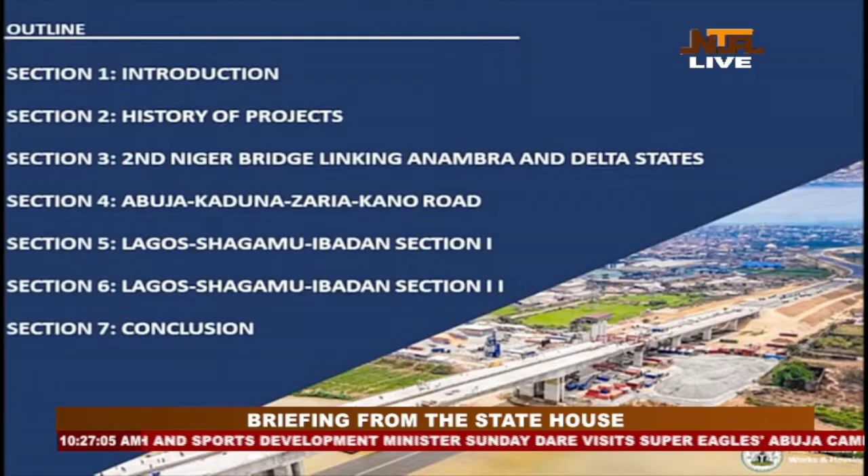So I'm going to start, well, I think that deals with essentially this slide, the background to the fund. What you see here are the projects under the PIDF. They're just a few projects. So there are those projects that have given us some headaches, if you like that word, as a country for some time. The Lagos-Ibadan Expressway. That road has been in the making since maybe year 2000, and no construction worthy of the name has taken place there until this fund kicked in, really.

The other project is the second Niger Bridge. Again, we've heard about it. Second Niger Bridge is coming. As I tell people, you hear about the second Niger Bridge just when elections are coming. And after that, nothing happens again. So that project is here now.

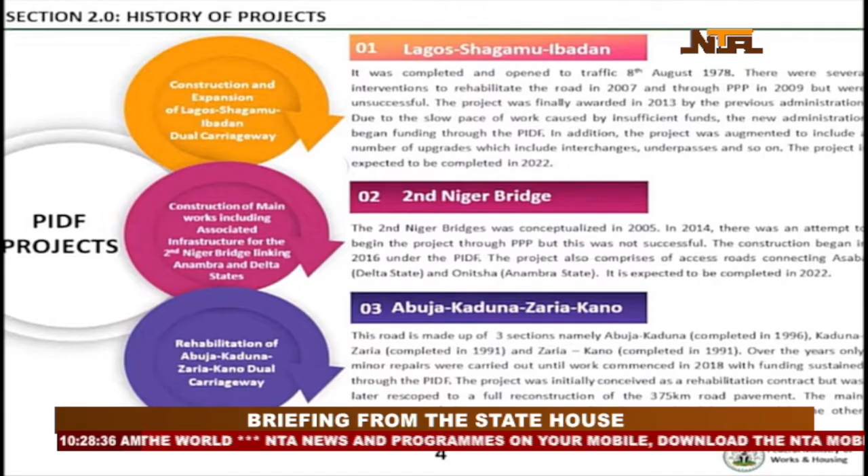And then, of course, the Abuja-Kaduna-Zaria road. The dualization of that road took place around 1986. I think it was about 175 kilometers of it then under the Babangida administration. It was completed in 1991. And since then, that is about 30-something years or thereabouts. So that road has reached the end of its design life. So it has to be rebuilt. So that's why you will see potholes, you will see failures.

Roads don't last forever. They are designed for a number of years, subject, of course, to maintenance and also, more importantly, lack of abuse. So if you don't abuse it, if you maintain it, it will achieve its design life. So that road has reached the end of design life and is now due for reconstruction. So let's start with the second Niger Bridge.

This is works going on. This was our last trip. I think that was March, right? When did we go? Man, time flies by for me very quickly, so pardon me.

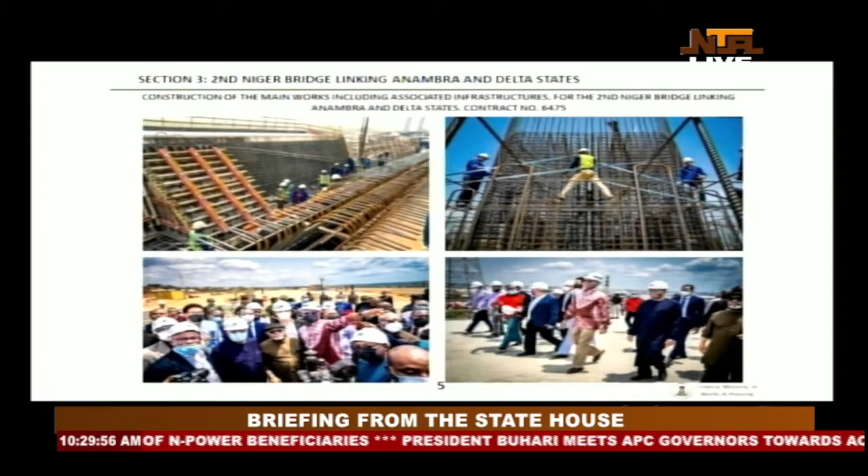Now, those who have followed this project will know that our ministry, either myself or the directors, visit regularly to monitor. But again, for the benefit of this meeting, we have a monthly meeting called the PIDF monthly meeting. And that meeting involves myself, the Minister of Finance, because there are financial issues, the MD of NSIA.

The meeting is chaired by the Chief of Staff to the President and all our directors, to assess progress. Reports from that meeting are passed on to the President because he's very, very passionate about this project. So he has first-hand knowledge of what is going on in this project, even without actually visiting.

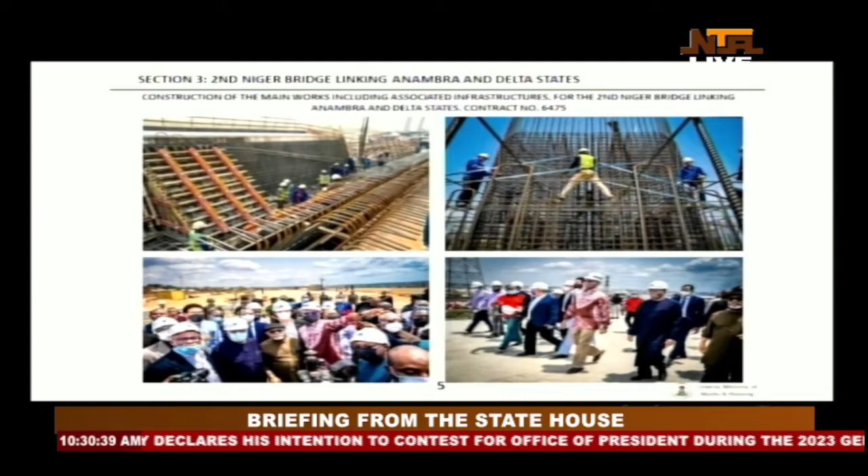So last year the Chief of Staff said, well, we see these things on slides, the contractors present to us every month. I want to go and see what is going on. So last year or so, we went to all the 3 projects, but the Chief of Staff was only able to accompany us on the Kaduna Zaria, where we had a town hall meeting. Some of you might remember. His work schedule made it impossible for him to complete the 3.

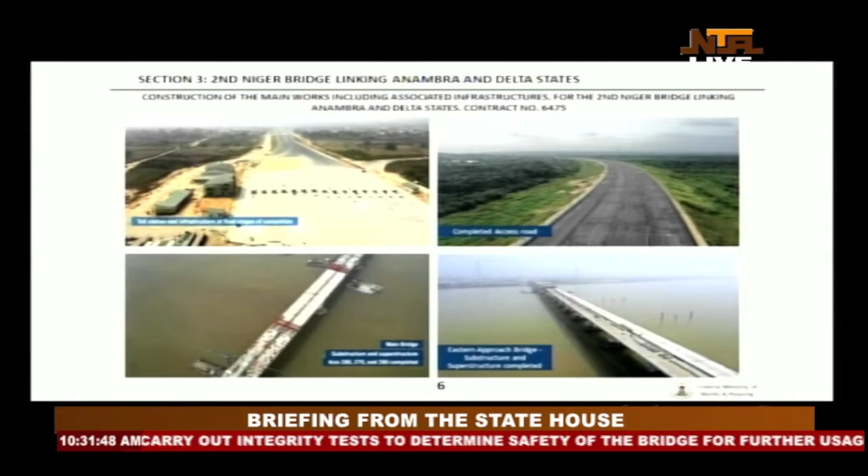And the ones to the bottom left and right are aerial shots of the bridge. Those 2 places where you see red items are structures for launching the beam. So those are the 2 places left to complete the bridge work. And they're just a few meters, maybe the distance between here and here. So I think one part of it would have been completed by the 15th of March. That was the deadline.

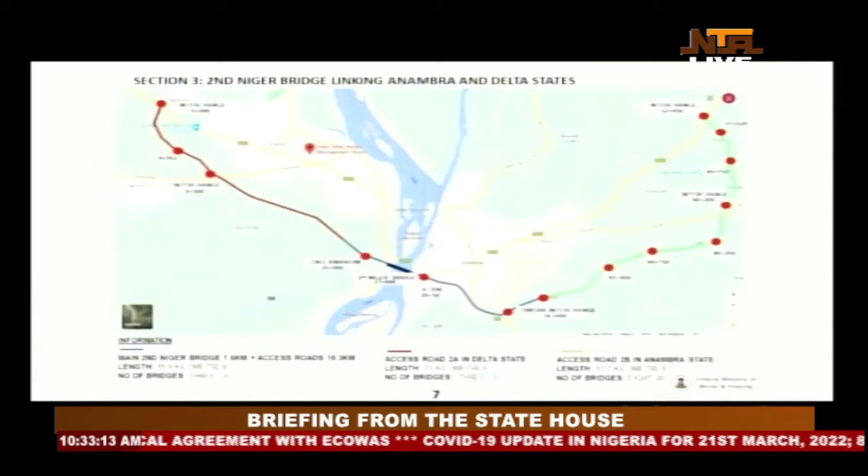In the middle there is that bridge. The sky blue area, let me see, I think there's a pointer here somewhere. Yes, this is the River Niger and all of its tributaries. So this part is the bridge itself, and this part is the access road, all this blue part up to here. I hope you can see. So all of this from here to here is 206 billion naira, thereabouts. 1.6 kilometer bridge and 10 kilometers of access road combined.

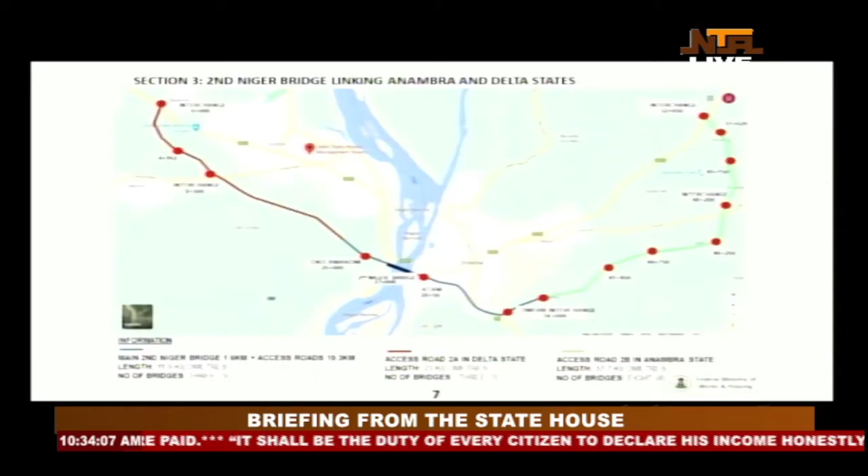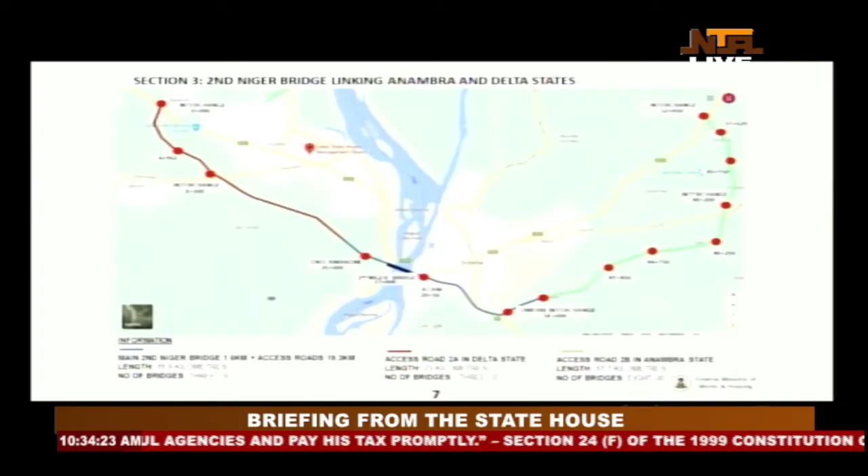Now, from here to here is 17 kilometers of access road on the Anambra side, I think. There's an interchange here, which is part of what we are doing now, but this green part is going to come later. It's not part of this current project. We call it phase 2B. And then there's this red part here that links this side to here. This is the Delta side. We call this phase 2A. Again, that's not part of this current project, but there will be work that will continue after we have delivered the bridge and the main access road.

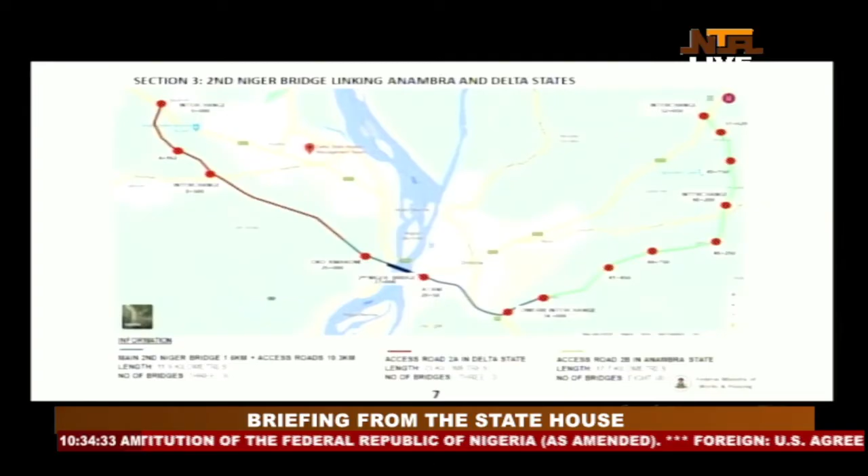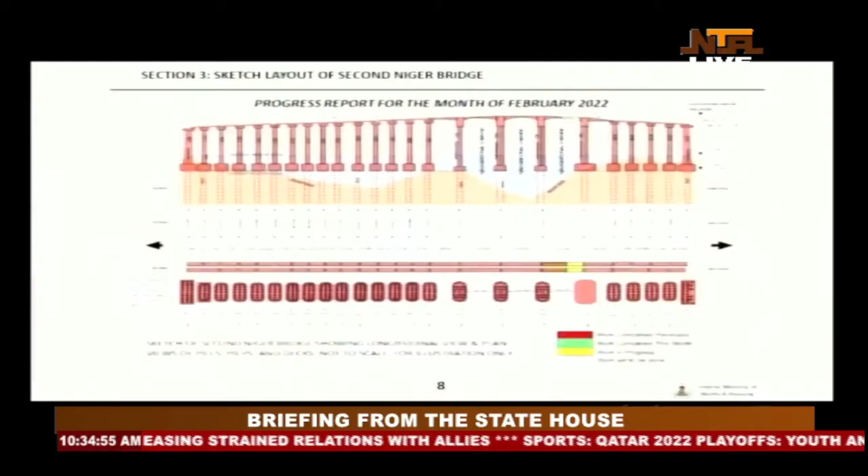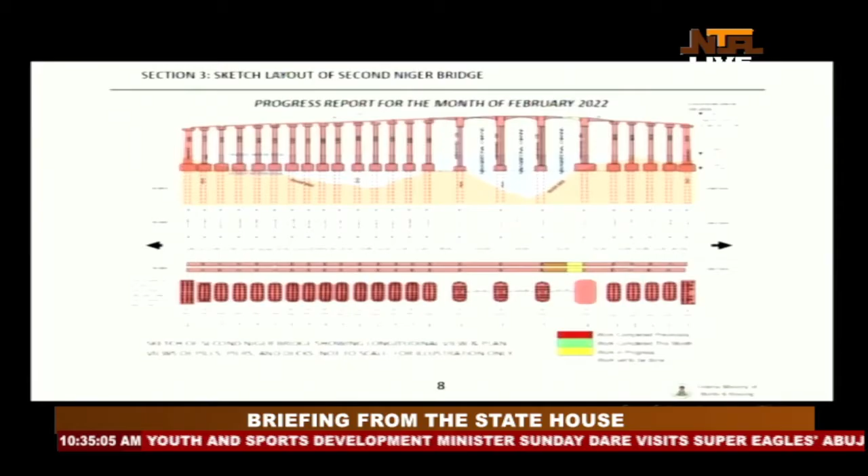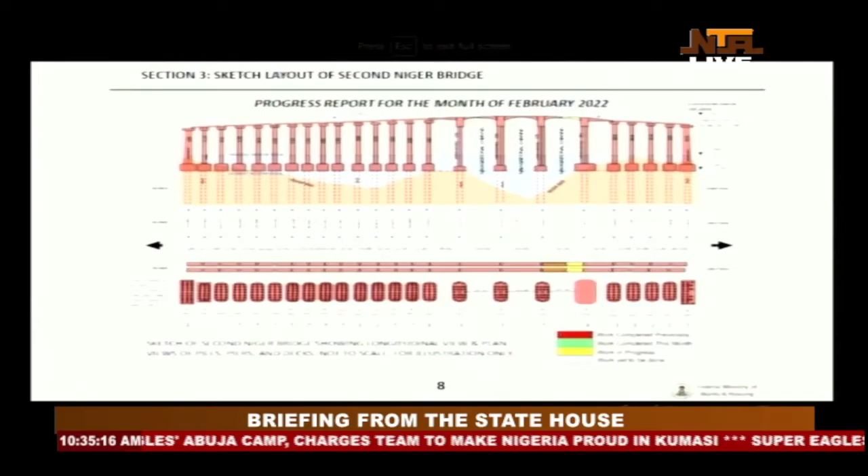So let me go quickly. This shows you a longitudinal view and a sketch of what has been done. All of these are the piles from beginning to here. Then you will have somewhere here later what the engineers call an abutment, which is like to ramp up. Am I right? Because I'm not one of them, but they try to teach me. Unfortunately, the details are not very clear, but I have something in my notes that I want to emphasize so you understand, there will be questions around this.

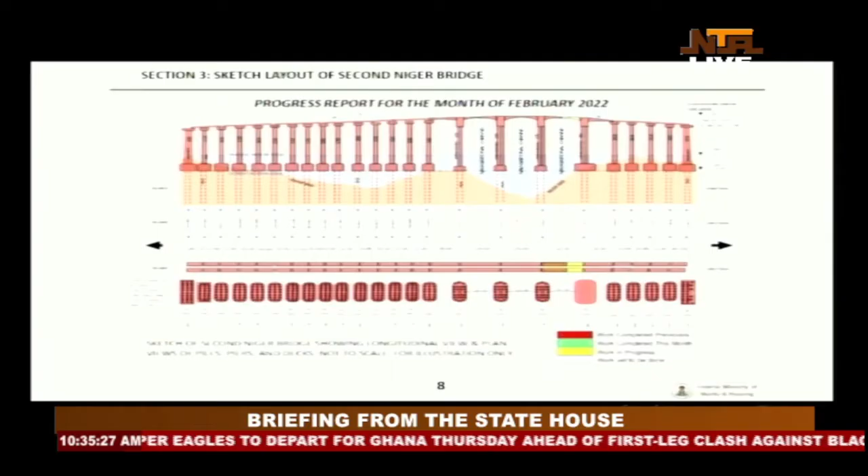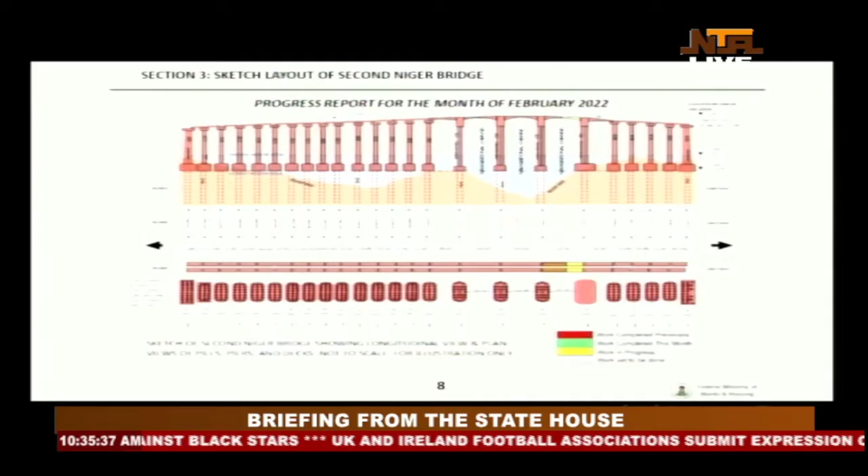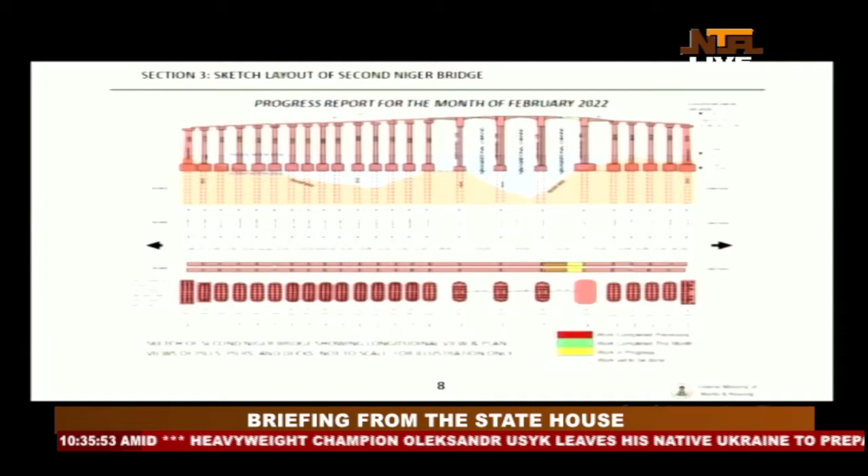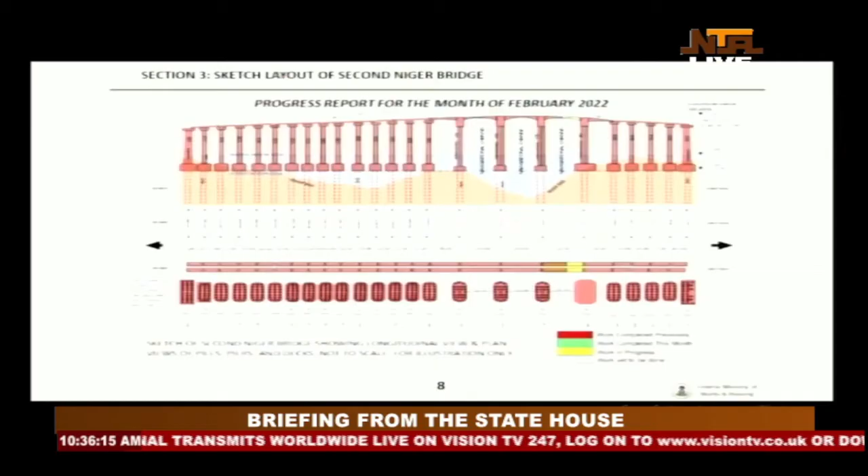Right here, the highest point of the bridge is 49 meters. If the average building from floor to ceiling is 3 meters, you are looking at about a 16-story building. This is the River Niger during the rainy season at full speed, and this is the River Niger during the dry season when the river level drops. This low point is 13 meters, about a 4-story building. This middle point, about 25 meters during the rainy season, is the equivalent of about an 8-story building of water.

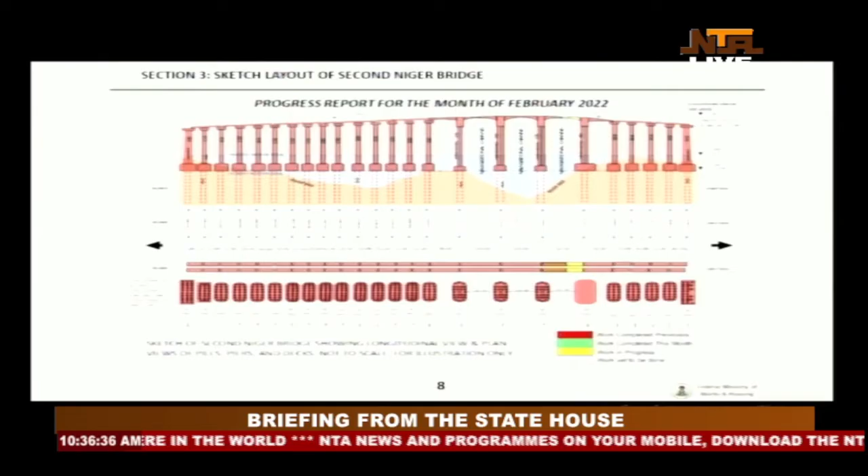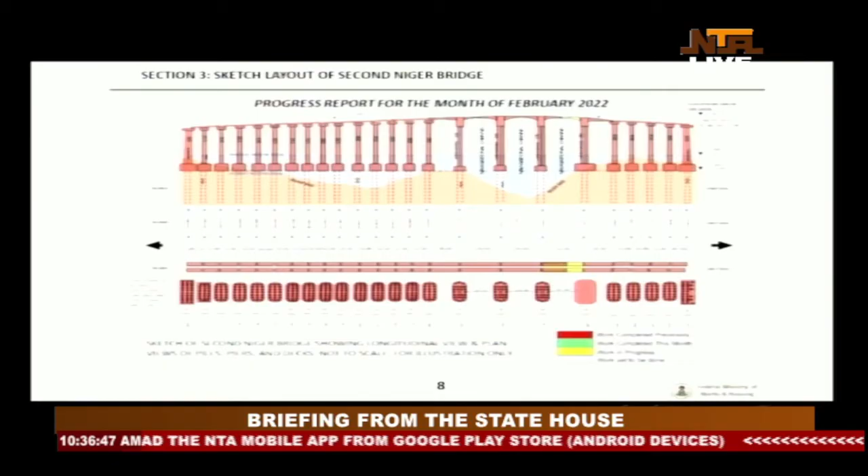So that just tells you what we have had to do. Then all of these are the sectional views of the piles. Each one of these has at least 25 piles, you know, those things that they pile into the ground. Each one has 25 to make one column.

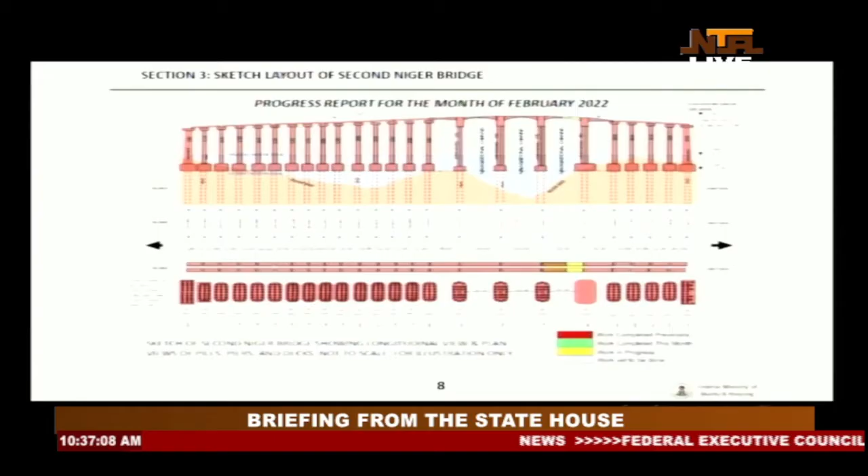Because this is a navigation channel for big barges, it is designed to withstand, I think, about the capacity of a vessel. If a vessel collides with it, it is designed, I think, for about 2,000 tons resistant capacity. So those are some of the things I can tell you about that.

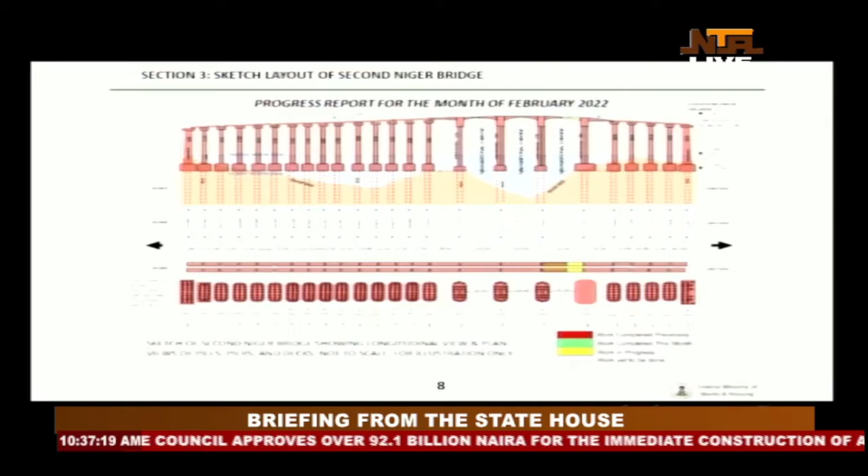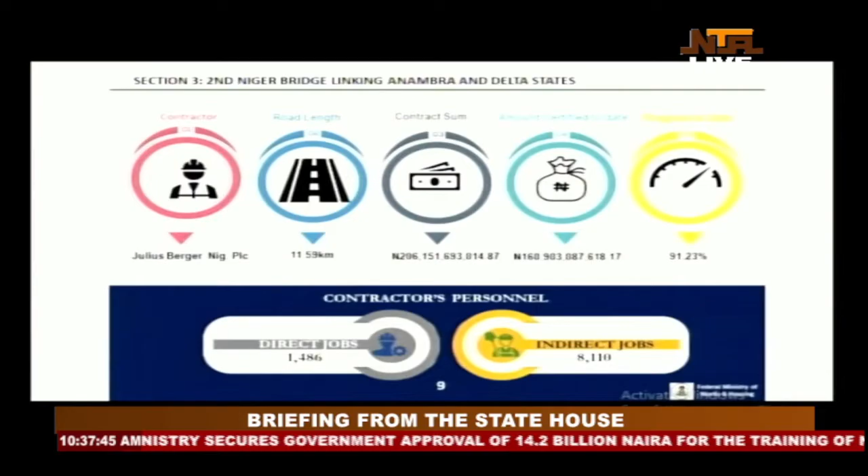Now, what you have here are just some details, and I will come back to this later. The length of the road that I told you about, the amount, 206 billion. The amount that has been certified to date is 160 billion, and the percentage level is 91%. At the moment, 1,486 people are directly employed here.

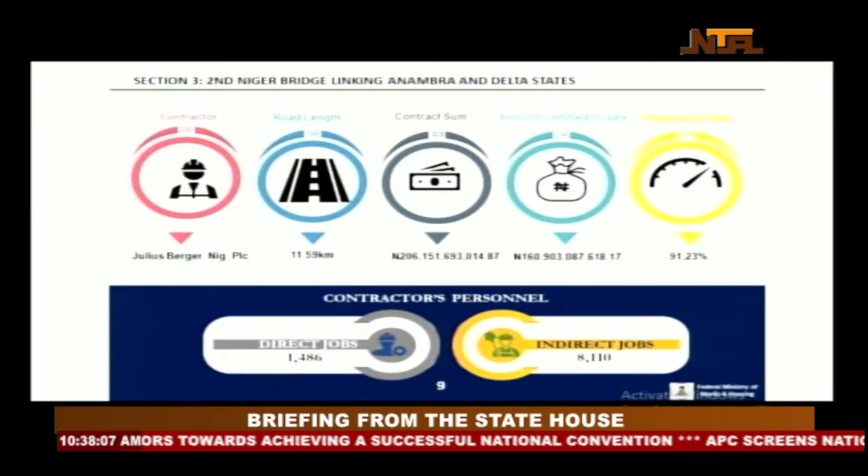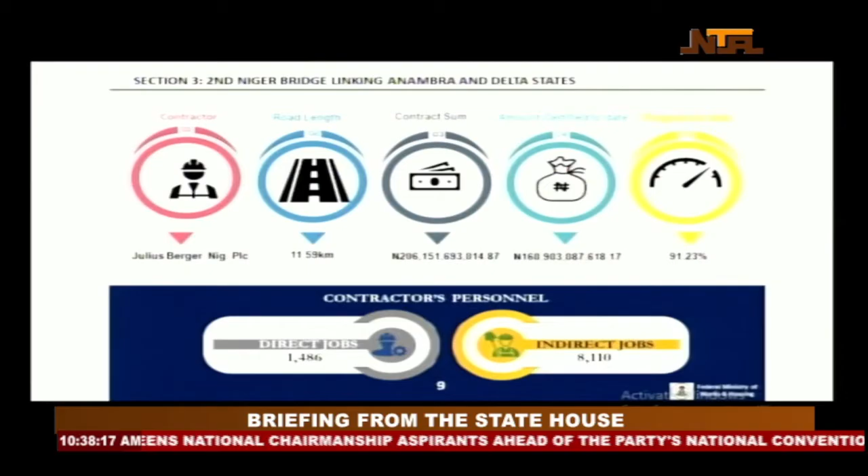So this is the place where people go every day. They leave home and say, I'm going to work. So if you look at that, that is 1,486 families. But I will come back to that. Then the spin-offs, the indirect jobs, and I will come back to this again. 8,110 people live off this bridge. Because this is happening, they are employed. Not employees of the company, but they benefit from this.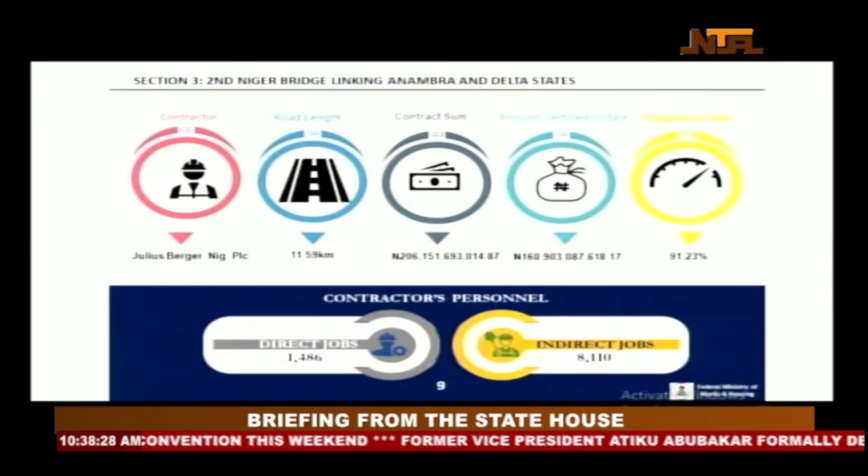So let me quickly, I will skip this because I'll come back to it in my conclusions. So let's just talk about what is happening. We took some people on our last inspection. This is what some of them are saying. We are happy. We have been hearing all this while about the second Niger bridge, but today at least I am stepping on it. The FG has really actualized the dream. That's Stella Ibuka. Then, we are happy. We thank the FG for making our dream come true.

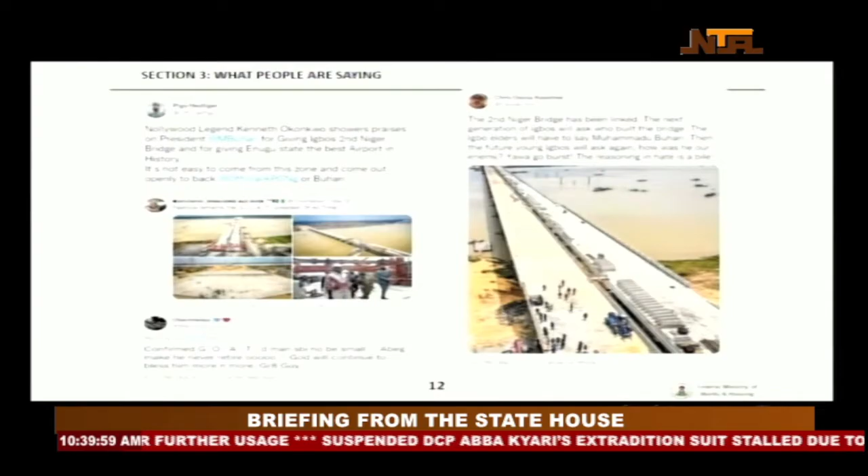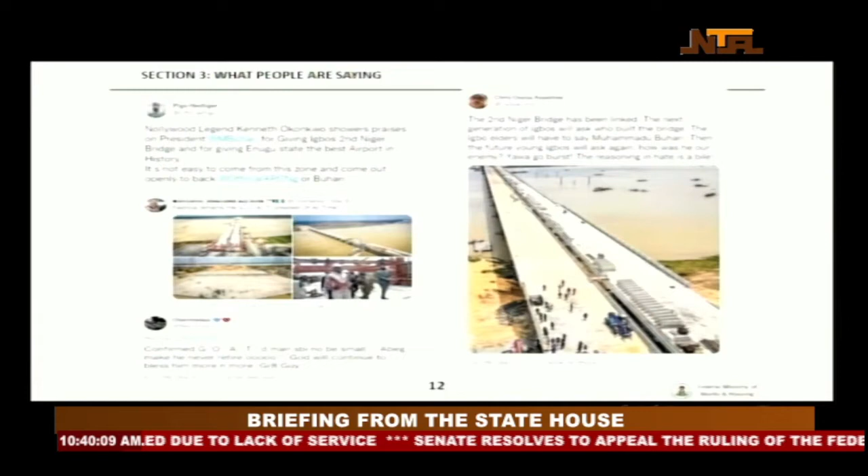So again, what people are saying: one Nollywood legend showers praises on President Buhari, confirmed, blah, blah, blah. The second Niger bridge has been linked. The next generation of Igbos will ask who built the bridge. The Igbo elders will have to say Muhammadu Buhari. Then the future young Igbos will ask again, how was he our enemy? Yawa go burst. The reasoning and so on and so forth. But there's been a lot of... So let's move quickly to Abuja, Kaduna. These are, as I said, some of the comments in the public space on social media. I'm sure many of you see it. There's a lot there, but this is us.

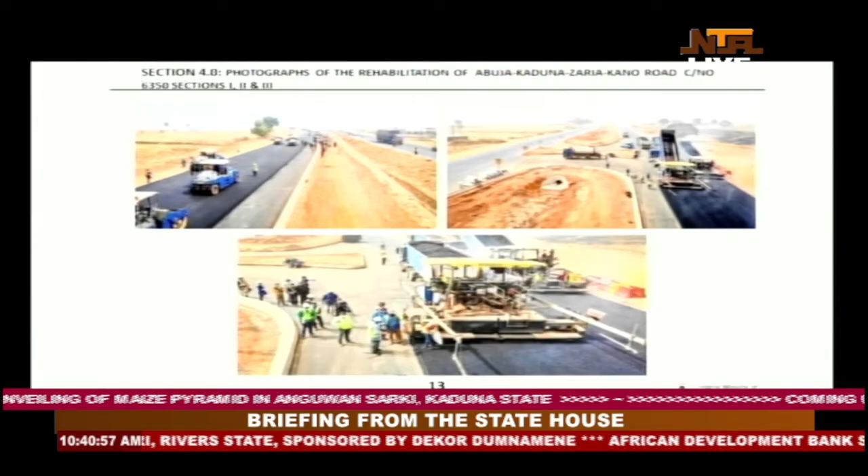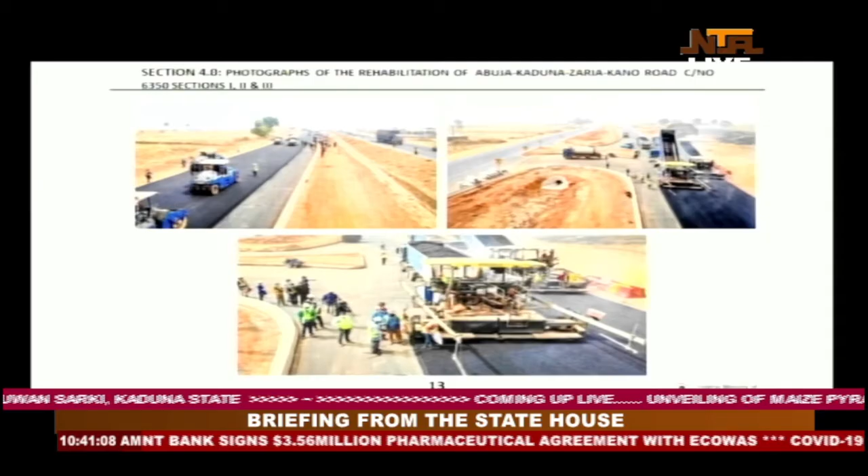So, yes, Abuja, yeah, sorry. Abuja, Kaduna, Zaria, provided some background just to let you into it. This is a 375-kilometer project. It's actually the biggest project in Nigeria. The cost is in the order of 700 billion. That length of 375 kilometers has 41 bridge components inside, 41. And this project started, I think, in 2018. So it was the last to start.

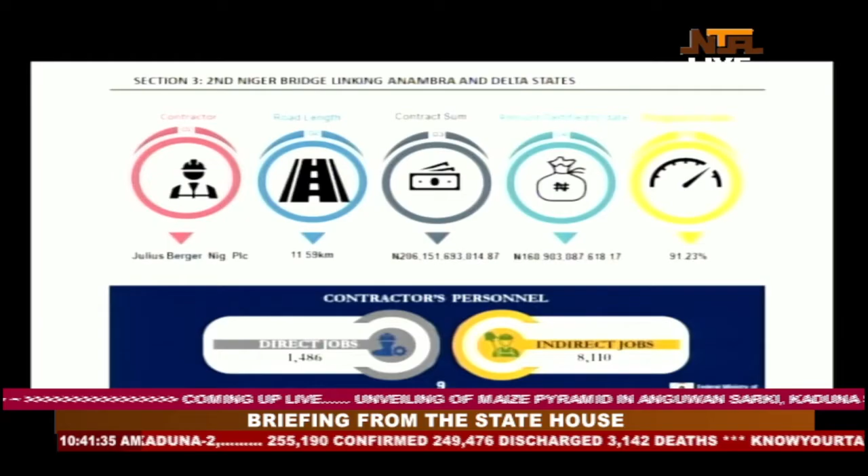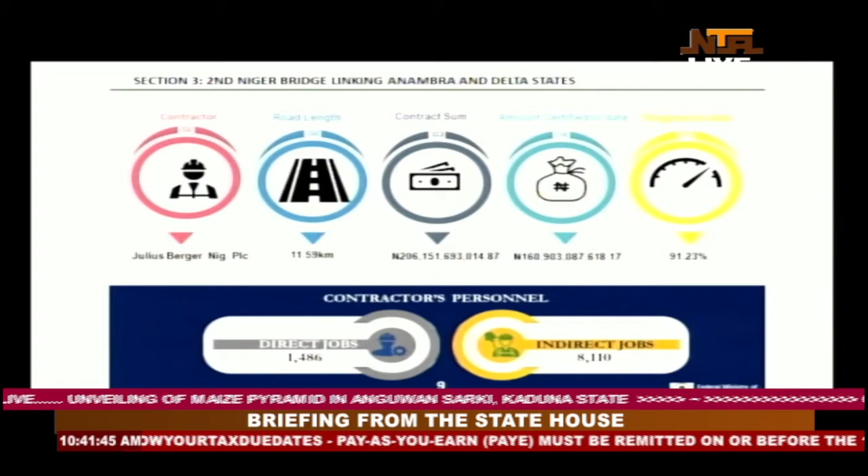But just to dimension the scope of work: in the others, we are talking about an 11, 10-kilometer road and a 1.6 kilometer. This is 375 kilometers over, I think, 4 territories: FCT, Niger State, Kaduna State, and Kano State. So that's how big it is. These are photos of sections where earthwork is still going on in some places. Asphalting is going on in some places. Asphalting has been completed, lane marking in some places.

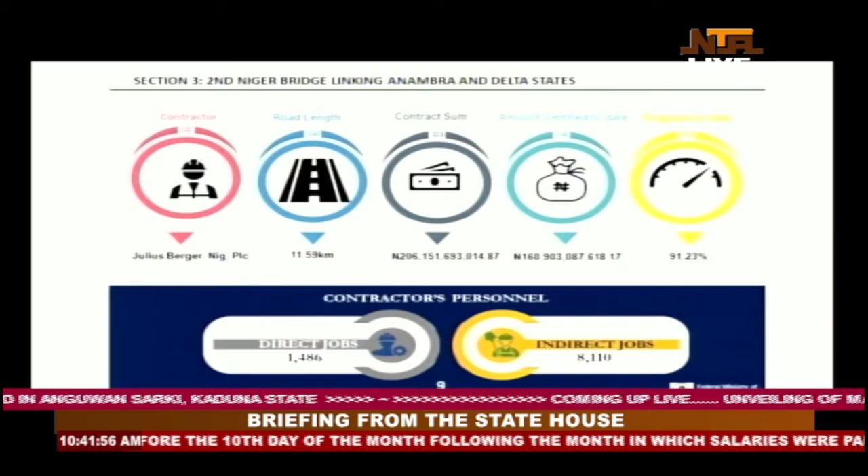So when people ask, when are you going to finish it? The instructive thing about a road as long as this is that we can't finish the road in one day. We complete it in sections. So we can lock up 10 kilometers and divert traffic to the other side, which you will experience. When that 10 kilometers is finished, it's done. We issue a certificate of completion to the contractor, he gets paid. We open that place to traffic. Once you start driving on this, it's finished, it's done.

Because the truth is that when we went on tour, I had to explain this to people. Can you imagine if we didn't do it this way? The only other way to do it was to close the road so that we can have one perfect symmetrical construction. That doesn't happen like that anywhere in the world that I know of. So assuming that we wanted to pour asphalt on one day, where will we get asphalt? Which companies can produce asphalt to cover 375 kilometers of 4 lanes at once? There's no such capacity anywhere in the world in 1 week or in 1 day. Then let us remember, asphalt has to be laid hot at a specified temperature. So how do you keep it hot?

So just to let you know this and also to share it with people that this is how roads are built in sections. Whilst lane marking is finished in some places, asphalting is going on. So let's go to the profile of this thing.

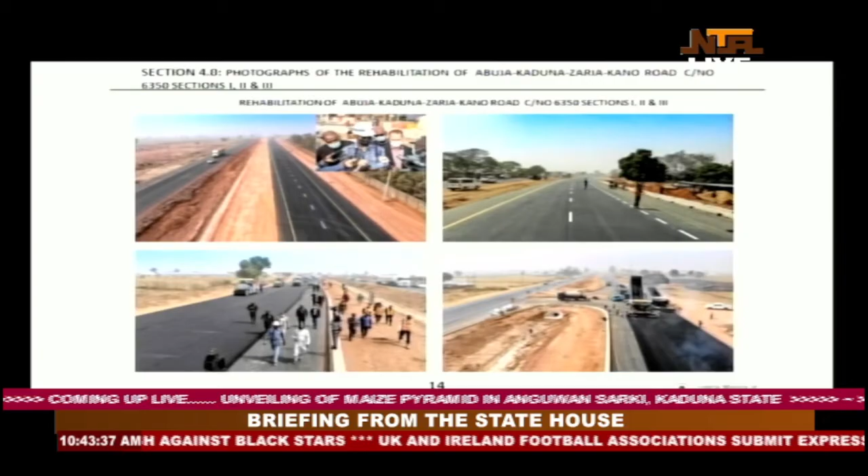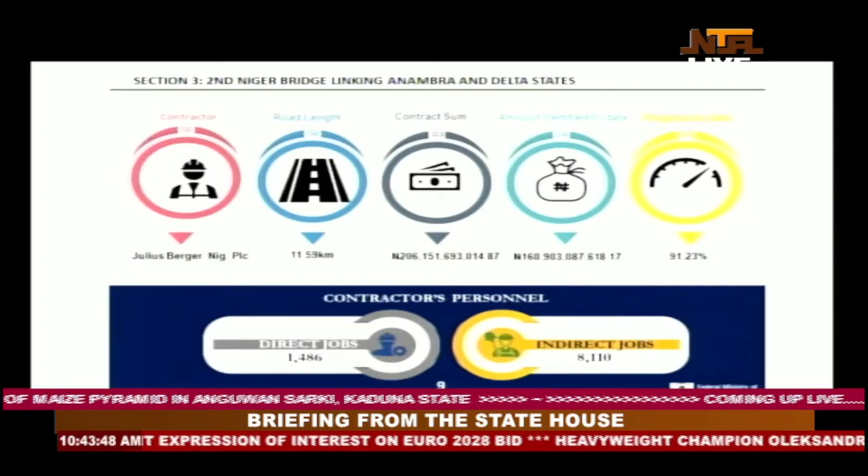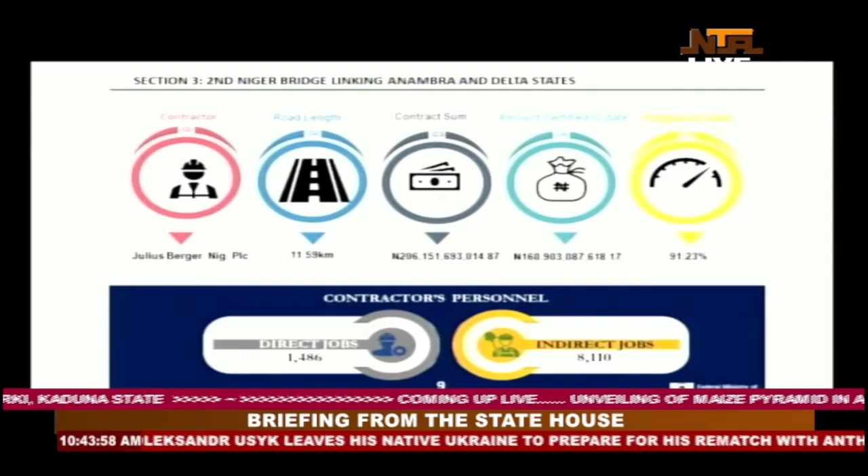JB is a contractor. You have 375 kilometers, as I told you. Cost is 797.236 billion. Right now, we have certified 296 billion. Gross percentage completion is about 22.41%, and I will address that later because the drag is on the Abuja to Kaduna section. There's a lot of work because there are 3 sections, but this is the gross report.

So, for example, if you have somebody performing at 90% in one place, 80% in one place, and a lower percentage in another place, if you add it up, it will bring down that 90%. But you will see that Kaduna-Zaria, Zaria-Kano are making progress. We are now trying to ramp up on Abuja-Kaduna, which is the most difficult part, and it is the longest part. That is where you have a lot of trucks, trailers.

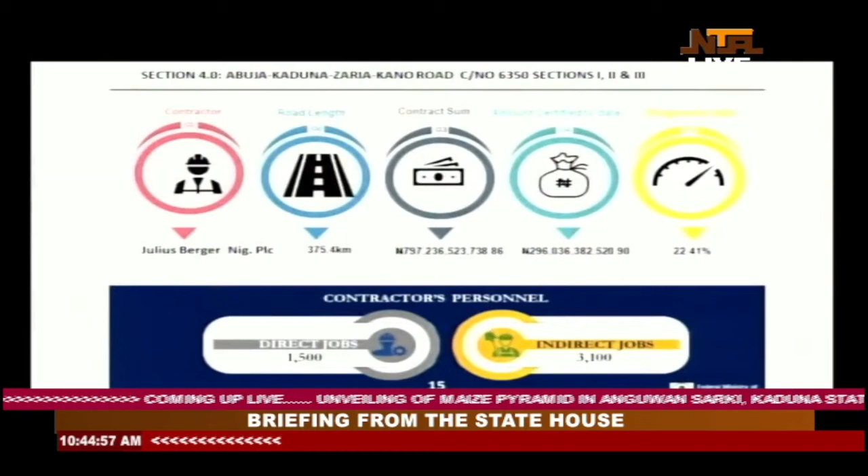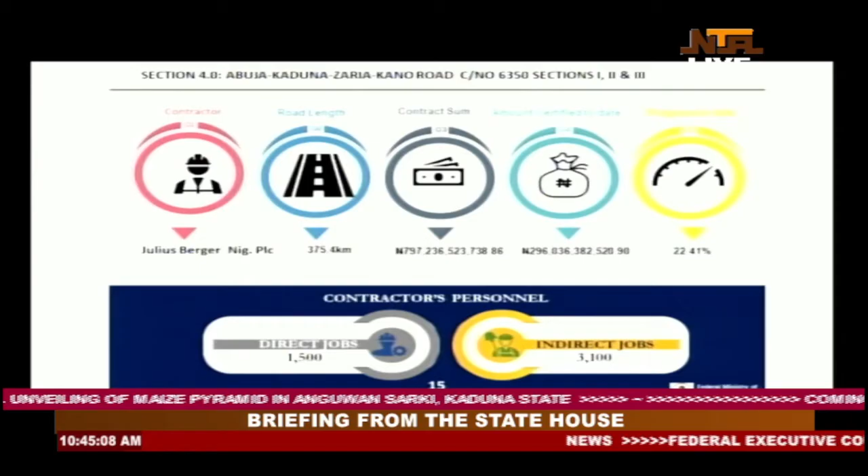On the way, we have to relocate them. That is the most densely occupied part, so we have to remove, what are they called now? Cable utility lines. We have to relocate communities that have settled there. Then the Ajaokuta-Kaduna-Kano gas pipeline of NNPC also crosses the road somewhere in that section. So we have to wait for them to do their crossing instead of building the road and then cutting it again. So these are some of the logistical issues we were managing.

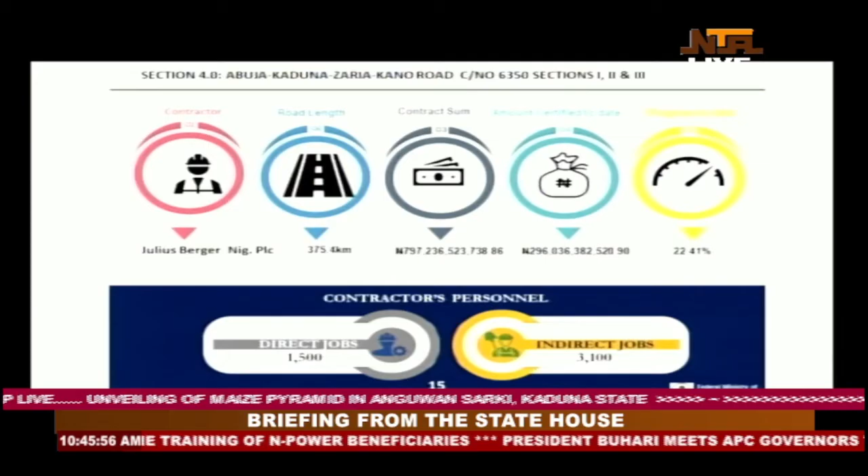But 1,500 people at the last count go to that route every day to earn a living. And this is important to note. In spite of the security challenges, people still go to work. This is the livelihood source. They must go. So what am I saying? We don't want any security challenges anywhere. But the point I'm trying to make is that sometimes the way the security issues are reported overlooks the fact that people still have to go to work. And they actually do go.

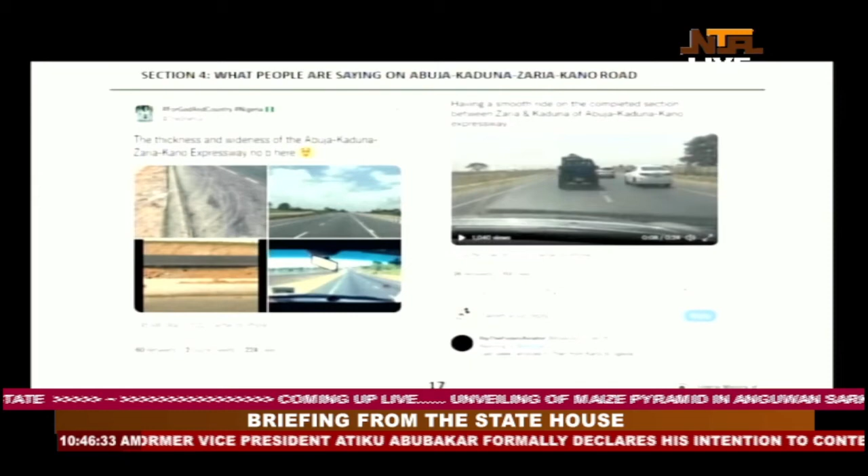We would love a situation where there are no security challenges. Of course, indirect jobs are about 3,100. I will come to this part again in my summing up because it's important to tell the story as I want to tell it. Of course, these are some of the comments, the thickness and the wideness of the Abuja-Kaduna. This is the quality of work that is being done, the thickness of the asphalt, the sub-base, and the cement mix on the pavement. And somebody just telling people he's already having a smooth ride on the completed section.

So you will have those experiences. There's a place where somebody called me and said he was doing 160. I said maximum speed is 100. He said, no, the road is too smooth. I said, go back to 100, please. So again, those are issues we need you to help us propagate, to educate everybody. The maximum speed on Nigerian highways is 100 kilometers. Maximum. Nobody should exceed it. Ideally, we like it to be at 90.

Because when anything goes wrong, you are in better control of your vehicle and you can bring it to a halt. And that is often the reason why accidents happen frequently. Loss of control over speeding is a major component. So if you can help us, this is something I need advocacy about, just to educate people, maximum 100 kilometers per hour.

Now, let's quickly go to the third project, and then I will head to round up. This is the Lagos-Ibadan Expressway. Now, it's in two sections. The first section is about 44 kilometers awarded to Julius Berger. That's the Lagos to Shagamu. And the second section is from Shagamu to Ibadan, awarded to RCC.

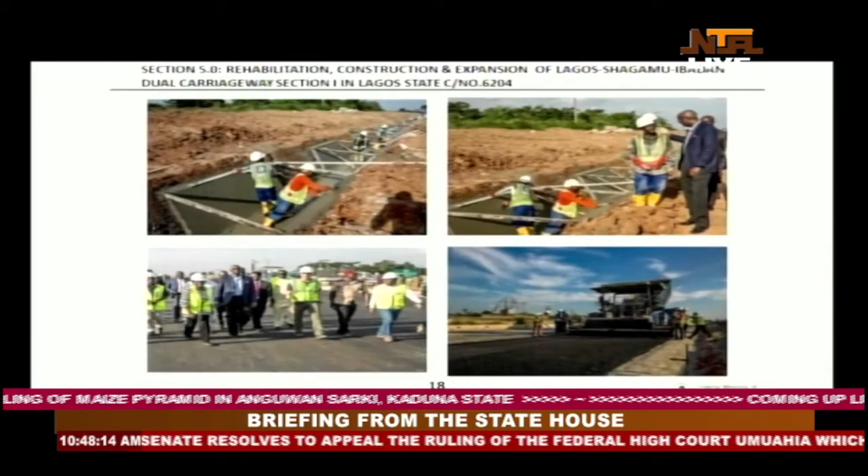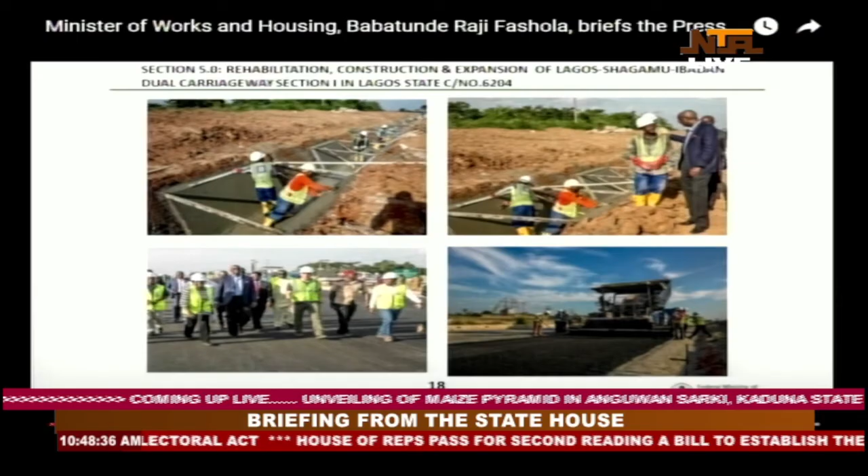Well, everybody is looking for just a road. To the engineers and to some of us who do this work, the road really is more than just the pavement we are all used to. I've had to learn this. The road starts from drainage. If water doesn't run off the road, that road is not going to last.

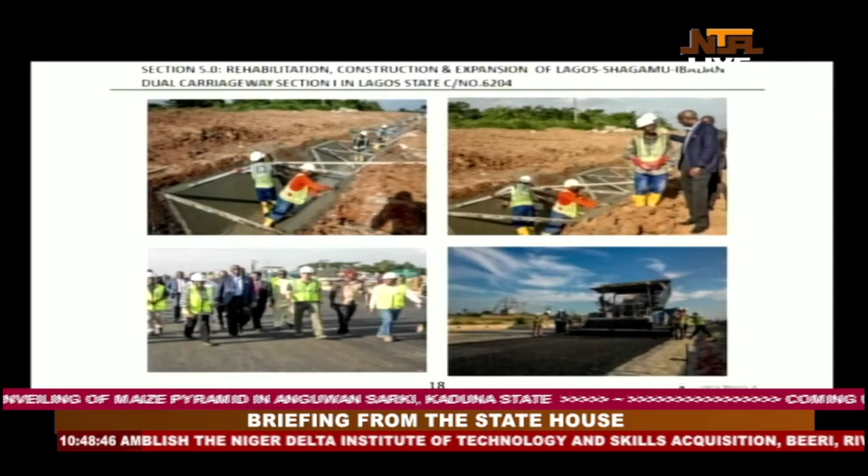Because, and let me spend a little time here, all that makes up a road, from the laterite that is compacted to the cement, we are taking pieces and bits of things and compounding them into a whole over kilometers. So we are binding things together essentially. So anytime water starts getting in and can't go out, what does water do? It dissolves things. And that's where, as simple as that, the road begins to fail. Water is even more tolerable.

Items like diesel, petrol are much more deleterious solvents. They will quickly destroy your road. So that's why people must not park and be changing engine oil, removing diesel, selling petrol on the roadside. It just is the beginning of the end for that road. And I hope that this audience can help us take that message as far as it should go. It's like setting a house on fire after you've built it.

So the drains are important, and those who have used this road, even as it's being constructed, will see the work that is being done to ensure that whenever it rains, as it will rain, the water runs off as quickly as possible. That is one of the things that will preserve the design life of the road. So these are already completed sections. The lane marking for this will soon start, and it will begin to look like any road we've seen in the world.

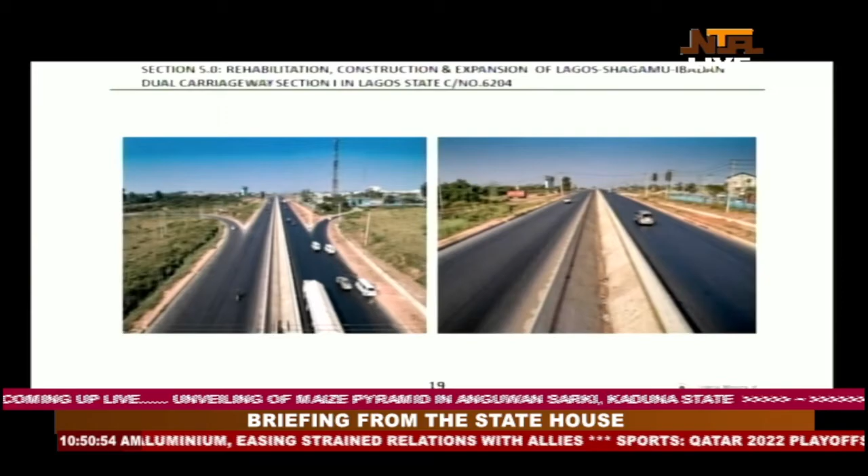So that section, section 1, Lagos to Shagamu, JB, 43.6 kilometers, as I said, is 134 billion. Because what we're doing there is that we're expanding the existing route from 2 to 3 lanes on each carriageway. And we're also providing some other services, service lanes. Amount that has been certified is 83 billion, 57% completion, and 396 jobs directly, employment, 485 indirect jobs.

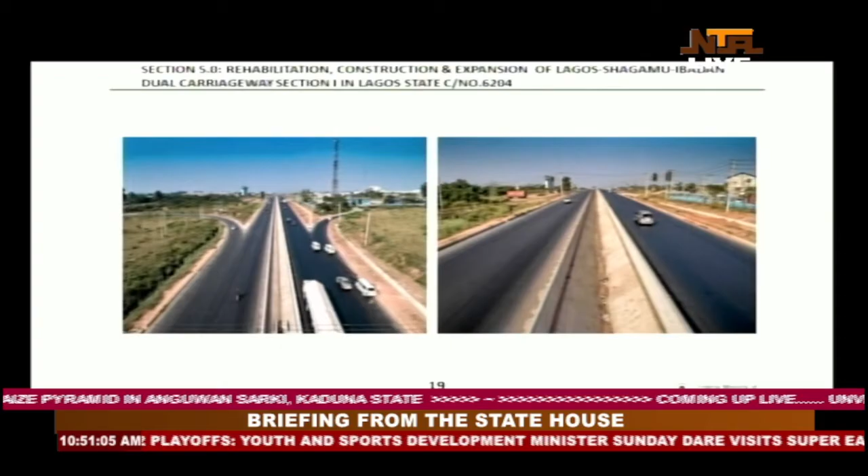Just like the Abuja Kaduna Highway, the Lagos-Ibadan Expressway also has at least 40,000 vehicles using it every day. So this is what we have to manage while we are constructing. So for people who have been concerned, oh, this thing is taking long, we wish we could shut it down, but we can't. So we have to manage traffic every day for people to get on with their lives.

So let me quickly go. I'll come back to this. That's another slide I've missed. I'll come back to it.

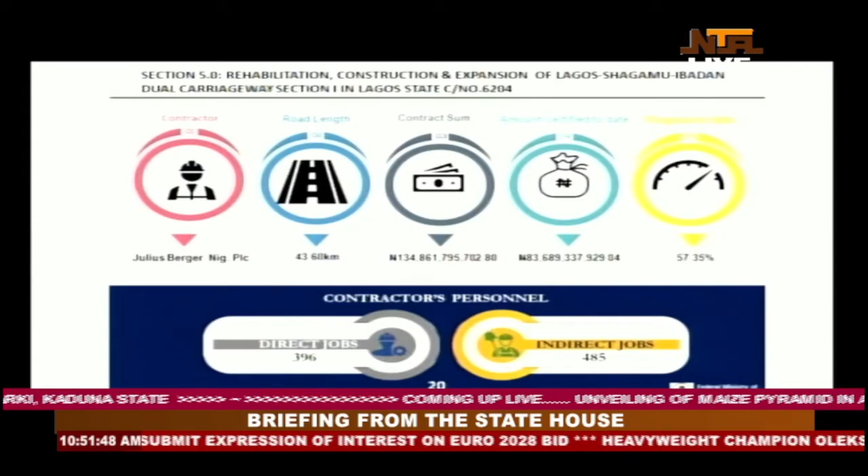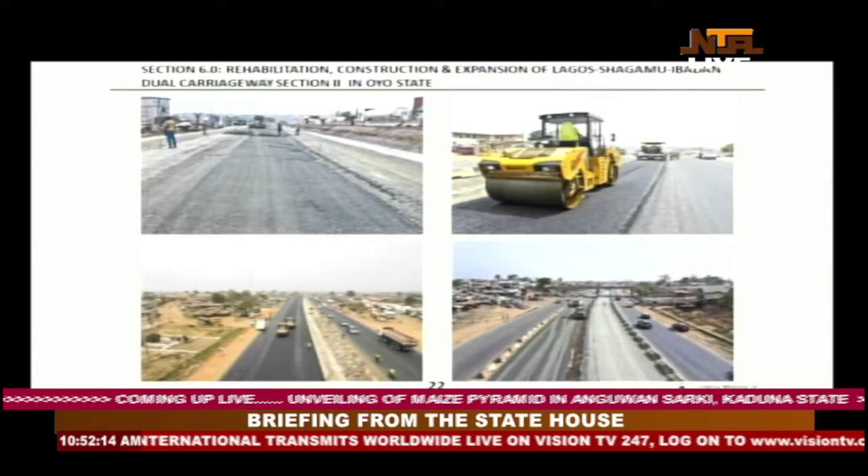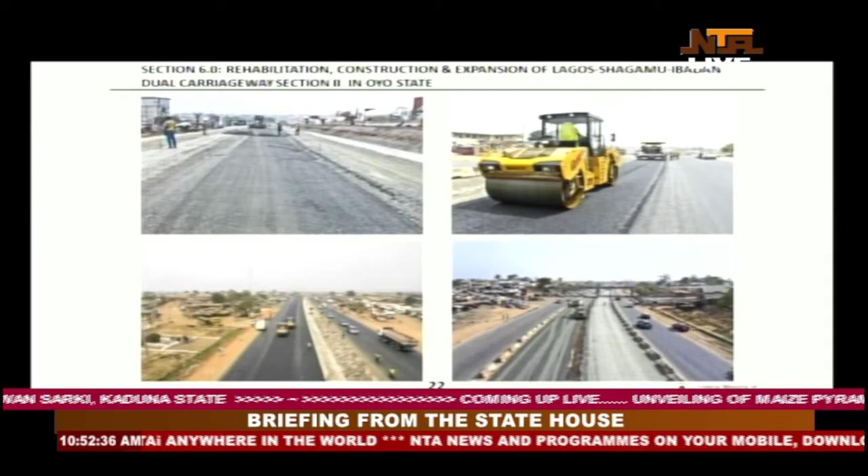Now, instructively, let me point out that this road is being reconstructed. So what is really happening is that we are excavating the entire road, removing bad soil, and rebuilding. We are excavating to over 1 meter deep on each inch of the 127 kilometers on both sides. And it's important to emphasize that. So it's not as if we are just scraping the surface. We're excavating and trucking away all those materials that have been dissolved over the years by diesel. We can't use them again. So we're getting fresh soil.

And the same thing is being done using a different technology on the Abuja Kano. What is happening in Abuja Kano is that the new technology has come to Nigeria by Julius Berger. They take the old material, go and reprocess it, recycle it, use chemicals and additives, and then bring it back. But that technology is not available here. And the engineers will tell you that if you build with old or recycled material, because they have been exposed to the elements for a long time, they are weaker if you reuse them.

So these are aerial shots of, as we are building, it is beginning to take shape. So the central carriageway there, this is concrete work done inch by inch, meter by meter, until it crosses the entire 127 kilometers. This is manual and mechanized labor to build that concrete barrier over 127 kilometers.

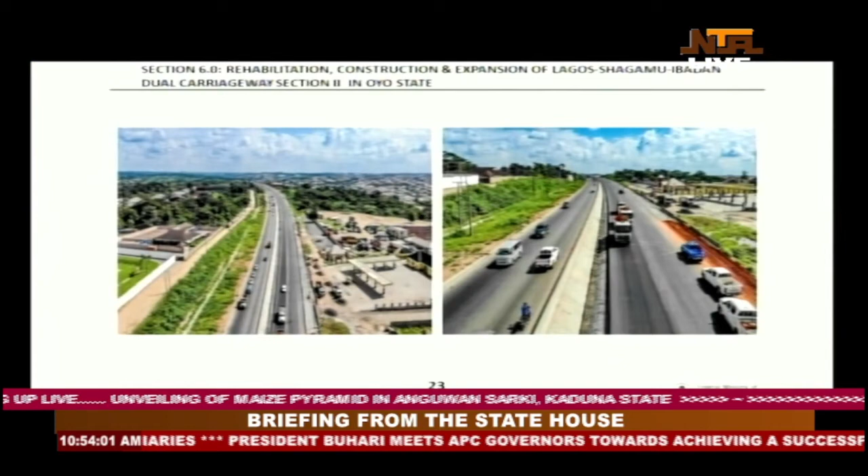So this contractor has 84 kilometers, 176 billion contract sum, certified 123.8 billion, percentage completion 69%, 734 workers, 1,733 indirect jobs.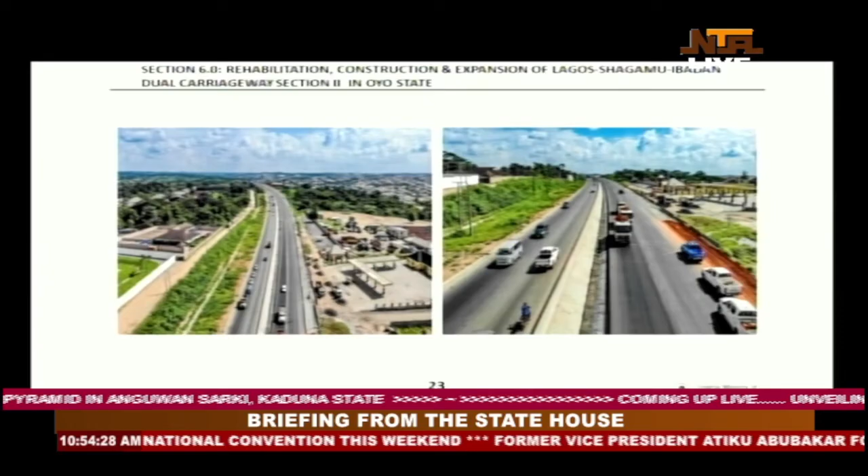I will come back to that slide. Now to the comments again.

So for the first time in over 10 years, Lagos-Ibadan Expressway was completely free on Sunday when commuters are trooping to Lagos to prepare for the week. Completely free on March 20th. That road makes it to my Thanksgiving list every weekend. So this is somebody's Thanksgiving item. So much quality, the drainage and the curbing are totally wonderful and visionary. One eternal problem solved, 100%.

Dear drivers, Lagos-Ibadan is not a race course. It is asphalt 8. There is no need for speed. Please calm down. Don't rush to heaven or hell. So I think we need to keep that message, as I said, going.

Now, let me go back to the 5 slides that I missed. And I think they are slides 10, 16, 21, 25, and this one. I'll come back quickly to them. So let me just find my way back slowly.

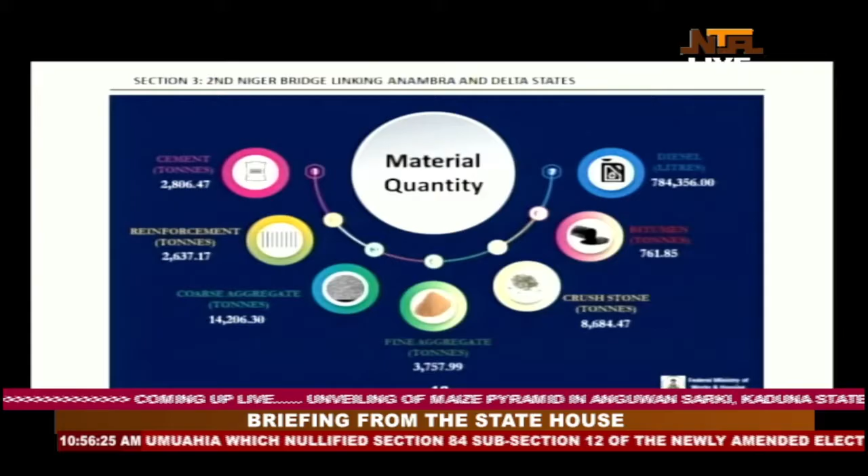I don't know how many of you are aware or familiar with the Marshall Plan in Europe at the end of the Second World War. If you are, you will see that after the Marshall Plan, every country has realized the intrinsic value of infrastructure as an economic driver. If you want to grow your economy, build the infrastructure, whether it's telecom, shipping, aviation, or transport. The more infrastructure you have, the more efficient, competent and productive you will be. And what happens during infrastructure delivery is that money trickles through the entire value chain. People make money, even if they don't come out to say, I am making money.

So let's go through some of it. On the second Niger bridge, to construct that bridge, we're looking at 2,806 tons of cement.

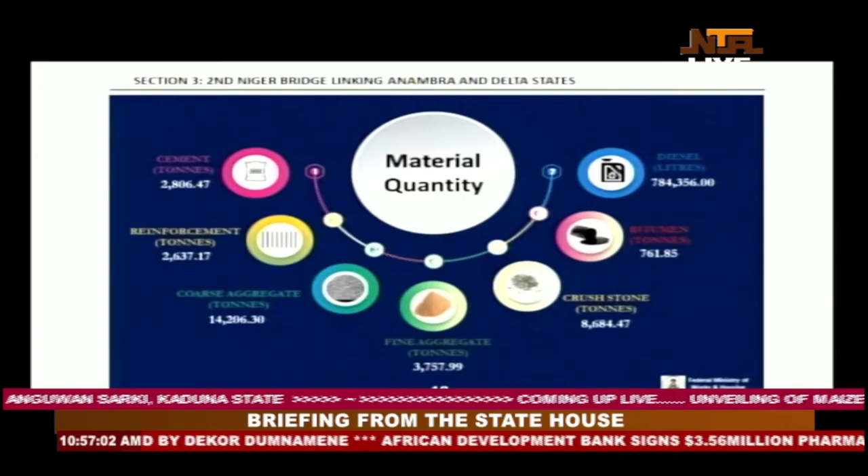2,806 tons of cement. Let me do the math for you. If 1 ton is 1,000 kg, divide by 50 kg per bag and multiply by this. You will see how many bags of cement are being consumed. Reinforcement, that is steel, 2,637 tons. Coarse aggregate, 14...

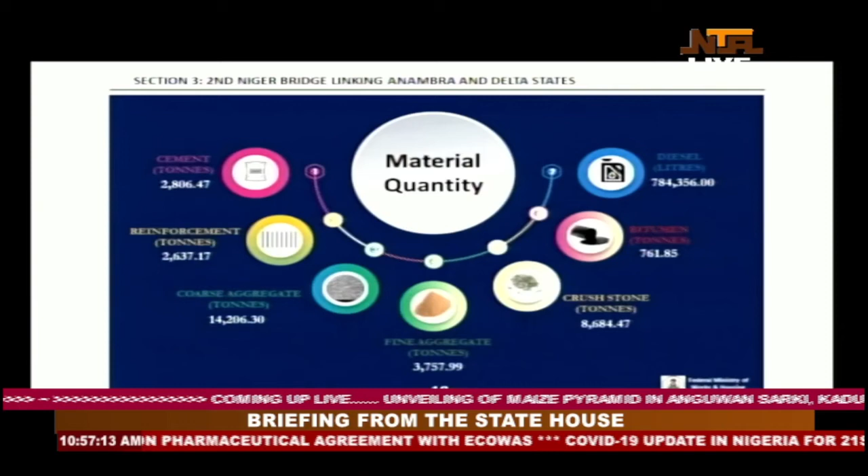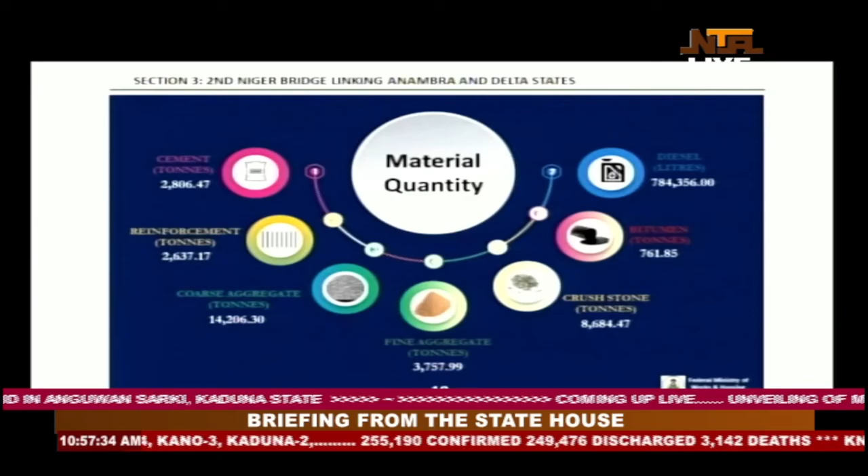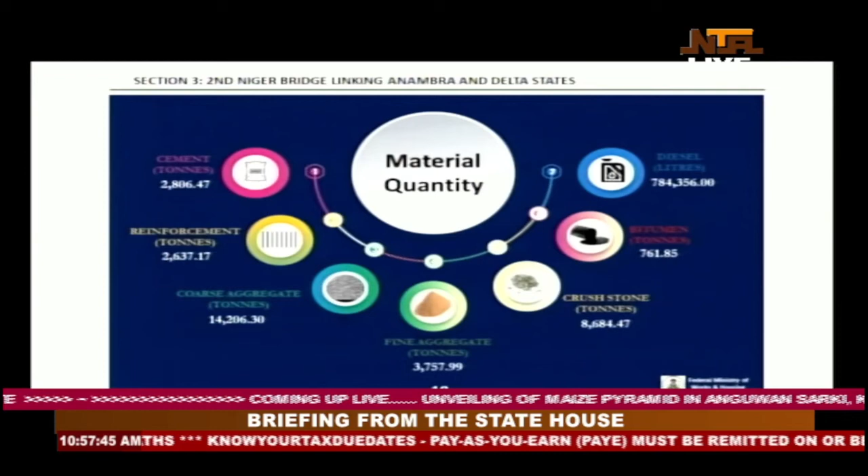So coarse aggregate comes from quarries. Blasting, crushing, processing, 14,206 tons. Fine aggregate, 3,757 tons. Crushed stones, 8,684 tons. Bitumen, 761 tons. And diesel, 784,000 liters.

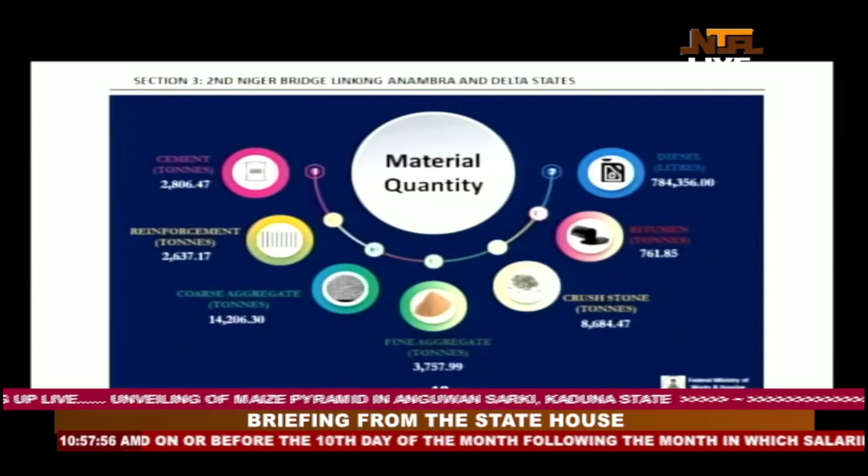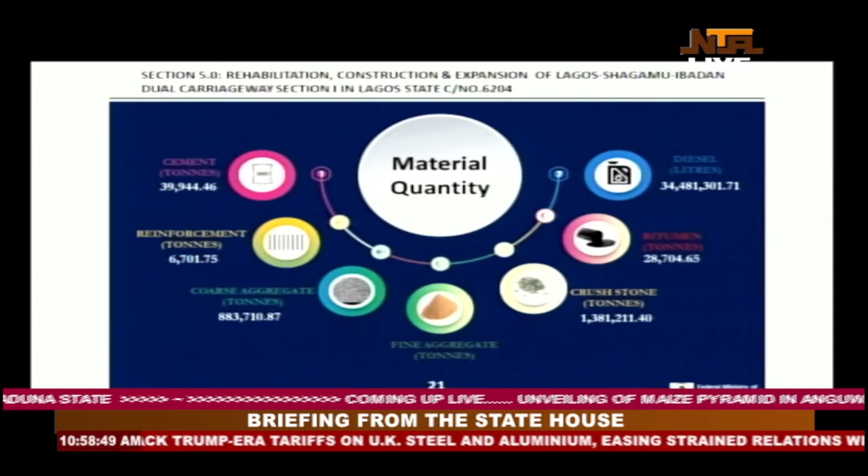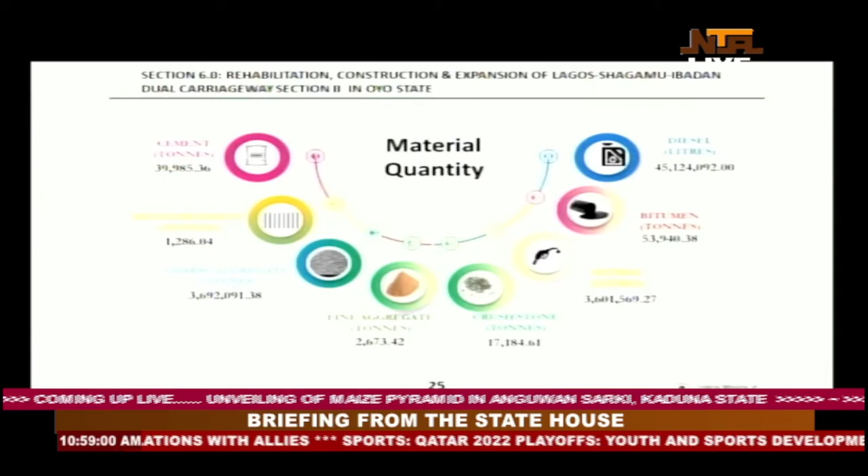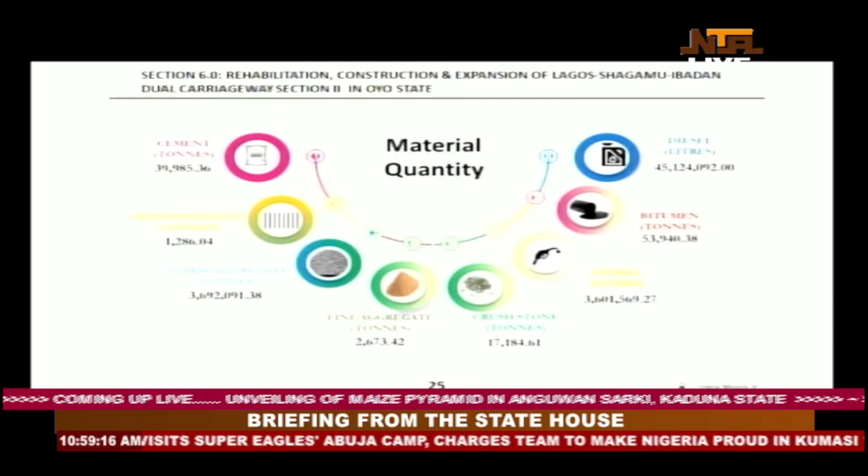What picture? First of all, see the aggregate total number of direct jobs. So these are 5,000 families, not just 5,000 of any nomenclature, people who are directly impacted that we can count. These ones are the indirect employees. So who are they? Some of them are those people who supply the bitumen, the aggregate, the crushed stones.

Julius Berger and construction companies don't keep those materials. What they have are their equipment and maybe their batching plant. Some of them own one or two quarries, but the truth is that when they need those numbers, it is the subcontractors and suppliers. Femi Adesina and Sons, BRF and Co., all of you and Co., Enterprises Limited. Those are the small businesses that drive every economy in the world.

Small law firms, accounting firms, engineering consultancies. Those are the people embedded here. That is the supply chain where the money comes from NSIA and hits the road. We haven't started talking about the laborers who earn a daily living. And if you sample across Nigeria, daily labor alone ranges from 2,500 a day to, in some places, 3,500 a day. So this is how the policy of the president reaches the street.

Even though he can't meet those people directly, they're feeling the impact of what he's doing. So I just thought that is important. So for people who say, oh, Buhari is building infrastructure, is it only infrastructure? This is a major linchpin of the economic agenda of this country. Because first of all, right now, people are getting stuff to do.

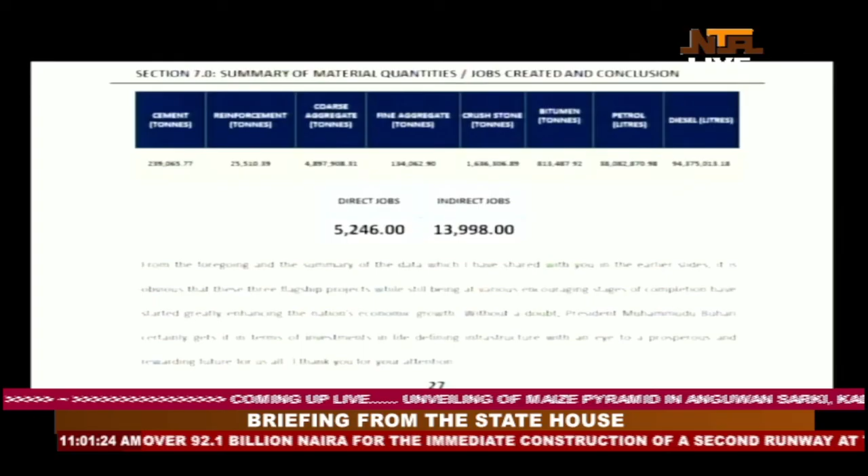And then we haven't talked about the food vendors. At each construction site, people must eat, and they eat twice a day, because I interact with them when I go there. A plate of food before all this cost of living started rising significantly was about 250, and they eat twice a day. So some of the people I speak to there who supply food go home with, after cost, 5,000 naira a day as a food vendor.

So this is a major economic driver, and I thought that I should speak to this part last because we focus more on the road, but you will see the hundreds of thousands of tons that affect the cement industry. So if you go to the cement industry, they are working at full steam. So people you and I know are employed there. If this isn't happening, they don't have that work.

Now, each of these contracts has a bank guarantee for the money they get. So the banks are making money; they don't give guarantees for free. So it is hitting the banks as well. Now, each of these contracts also has a 7.5% value-added tax component. So look at 700 billion and apply 7.5% on Abuja-Kano. Look at 206 billion and apply 7.5%.

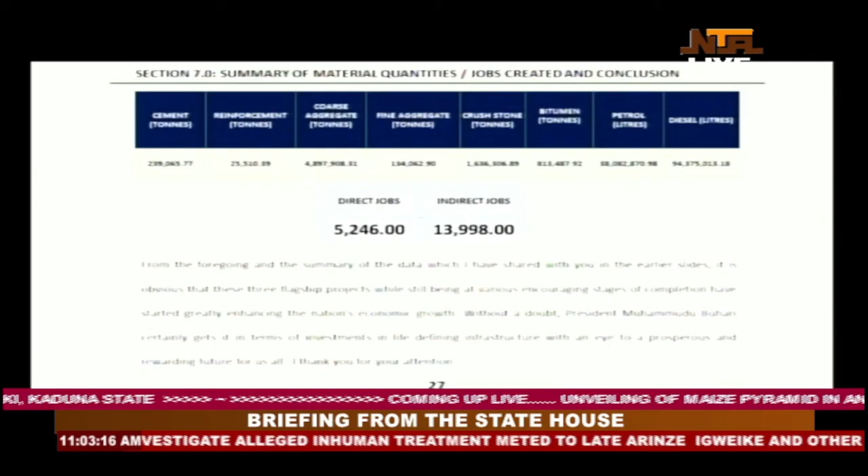When that VAT, collected by FIRS, comes to the center, 85% of it goes to the states and contributes. So there are too many sides of infrastructure that this meeting and the time we have cannot let me dwell on. But I think this is a convenient point to stop to make the economic link.